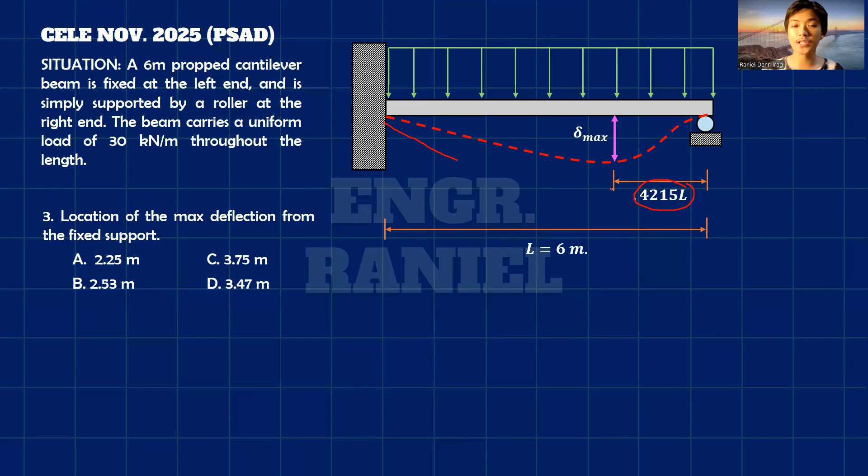So ito yung L natin which is equal to 6 meters. So, ang solution natin dito, dali lang. So, 0.4215 times L, ang L natin is 6 meters. So, ang sagot natin is 2.53. That is letter B. Okay? And that is wrong. Bakit wrong yan? Kasi ang tanong sa atin, location of the max deflection from the fixed support. So, itong formula na ito is ginagamit lang kapag ang location mo ng max deflection is from the prop or from the roller support.